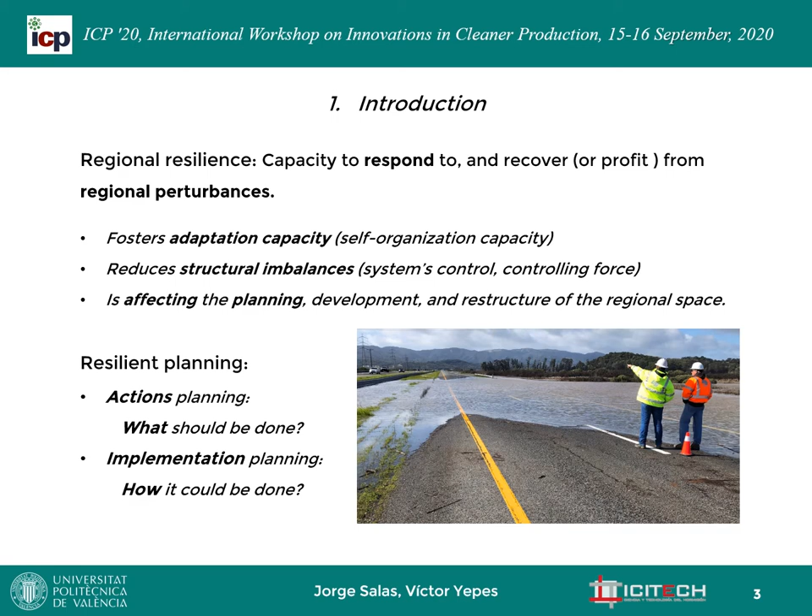Resilient planning, on the other hand, should provide answers to the questions of what actions are required and how these actions can be carried out. In consequence, resilient regional planning must provide a plan of actions for addressing external perturbance which, at the same time, help reducing structural imbalances. Besides, regional planning must promote adaptation capacity and preserve systems control, 2 objectives that usually are in conflict, but which can be balanced by regulating the decentralization level of governance structures.

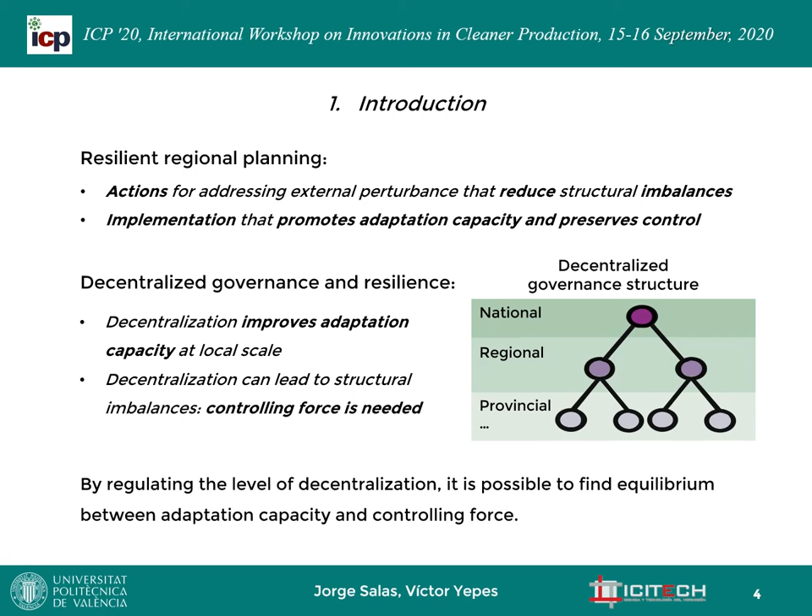While the design of resilient actions has been extensively treated in the planning literature, there are but few studies tackling the balance between adaptation capacity and systems control. This communication focuses on the resilient planning of the maintenance of the Spanish road network. Spain is a country with a strongly decentralized governance framework composed of 50 provinces grouped in 17 regions.

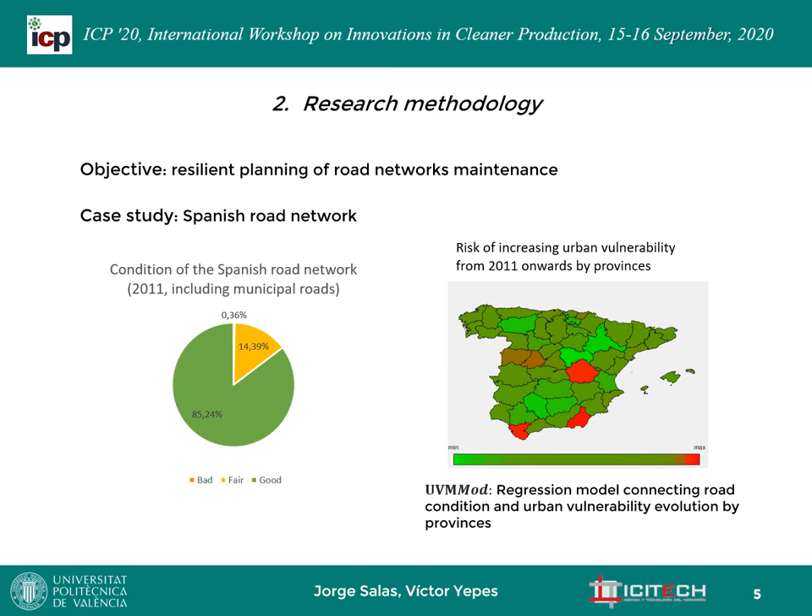Previous work has evaluated the risk of each Spanish province of increasing urban vulnerability, which, together with the condition of the road network at each province, affords a comprehensive planning approach in which both biophysical and socioeconomic aspects are taken into account. Based on the information gathered from the EIEL, a comprehensive infrastructure inventory carried out by the Spanish government, the planning process looks for the quantity of each possible type of maintenance actions that should be performed along the next 10 years. The inventory classifies the road network's current condition in good, fair, and poor condition.

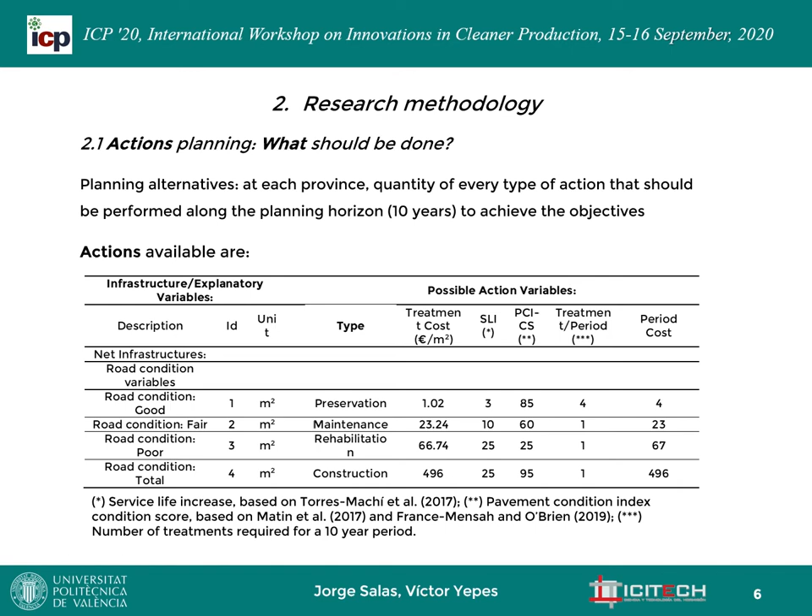Consequently, the types of action that can be taken are preservation, maintenance, or rehabilitation, depending on the condition of the road being treated. In the process of calculating the effect of actions over inventory, roads being treated will present a good condition at the end of the planning period, while those not being treated will degrade. For example, roads in good condition without preservation will be in fair condition at the end of the planning period, and so on. By means of this logic, we can estimate the condition of the road network at the end of the planning period. Based on this, we can easily compute both the condition score improvement as well as the urban vulnerability mitigation.

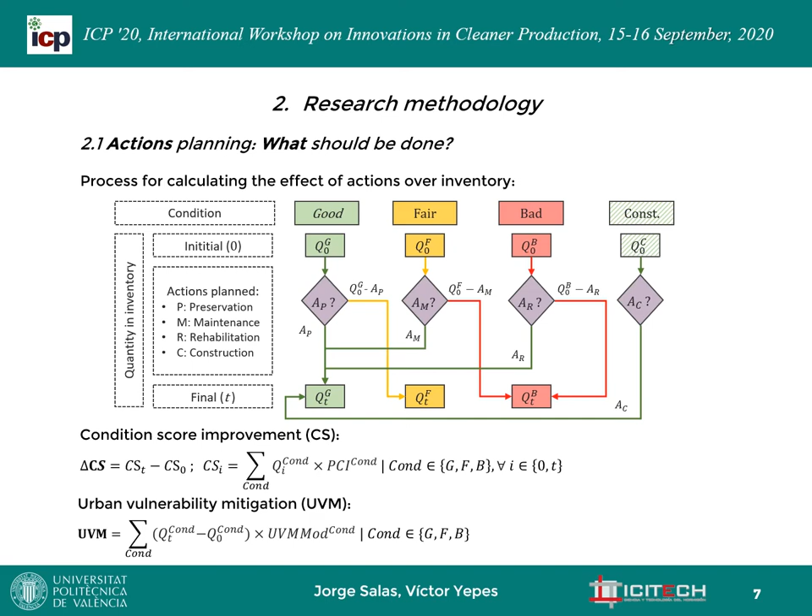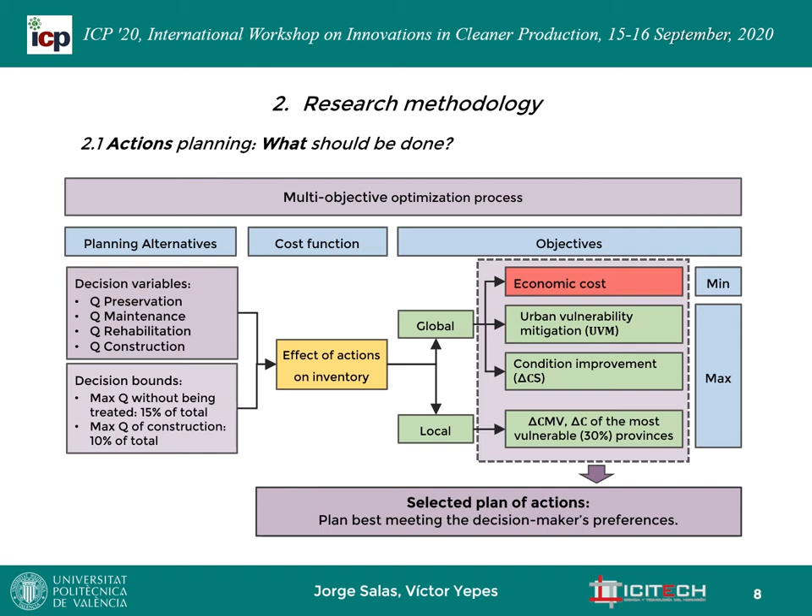The planning process is formulated as a multi-objective optimization process in which the decision variables are the quantity of each possible action to be carried out over each province. There are two types of objectives. Global objectives represent the performance of provinces at network level. These objectives are the minimization of economic cost, the maximization of urban vulnerability mitigation, and the maximization of the condition score improvement. There is also a local objective, the roads condition improvement in the most vulnerable provinces, which aims to reduce structural imbalances between Spanish provinces. The multi-objective optimization process yields a set of Pareto optimal solutions from where, based on the decision maker's preferences, it is possible to select the proper plan of maintenance actions.

As a second step, we need to design how to implement the selected plan of actions across our territory governance framework. We have formulated this governance framework as a hierarchical probabilistic relational model in which nodes are the entities and the links are the relational contracts. These relational contracts regulate the transference of decision capacity and responsibility from the top entity to the down entities. In this scheme, the rights represent the capacity of each down entity to adapt the baseline plan passed from the top entity, while the duties are the performance the down entity must achieve in exchange for the transferred decision capacity.

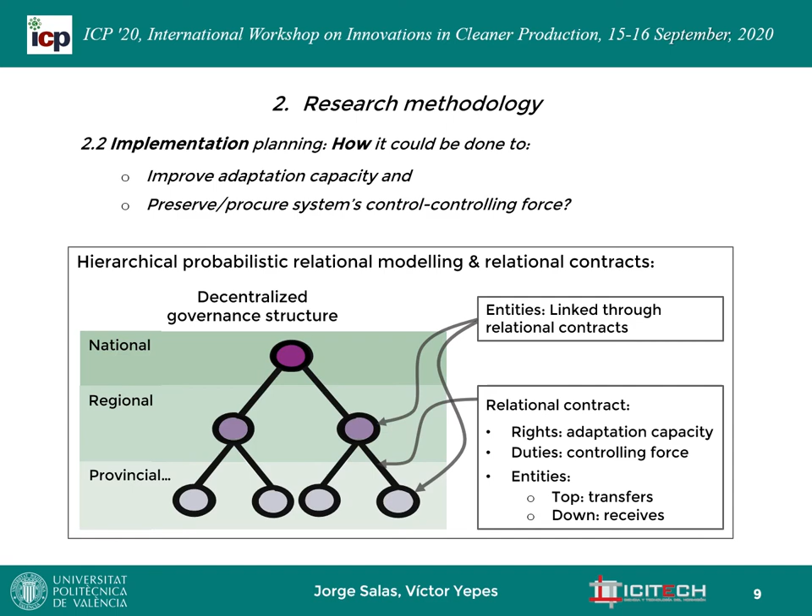We have formalized the logic underlying relational contracts. Rights are the range in which the down entity can modify the baseline plan of actions passed by the top entity, and they are used to build candidate adapted plans. This is where duties come in. Duties are a range from the baseline performance that a candidate plan should meet to be acceptable.

Accepted candidate plans are then carried out, determining the performance of top entities which, in turn, have their own top duties. That is, top entities' performance depends on down entities' adapted plans. In the case that top entities' performance falls outside the top duty range, we will be before a failure or windfall event. And this framework, implemented as a Monte Carlo simulation uncertainty analysis method, affords the calculation of both the risk of worsening the performance and the opportunity of improving it.

Finally, as in the case of the planning of actions, we resorted to multi-objective optimization to find out the optimal decentralization configurations. In the case of the implementation planning, the decision variables were the rights and the duties of each region and provinces, while the objectives were the maximization of local rights, the maximization of local duties, the maximization of local opportunity, and the minimization of global risk. Then, as in the case of the planning of actions, the decision maker can select the most suitable decentralization configuration.

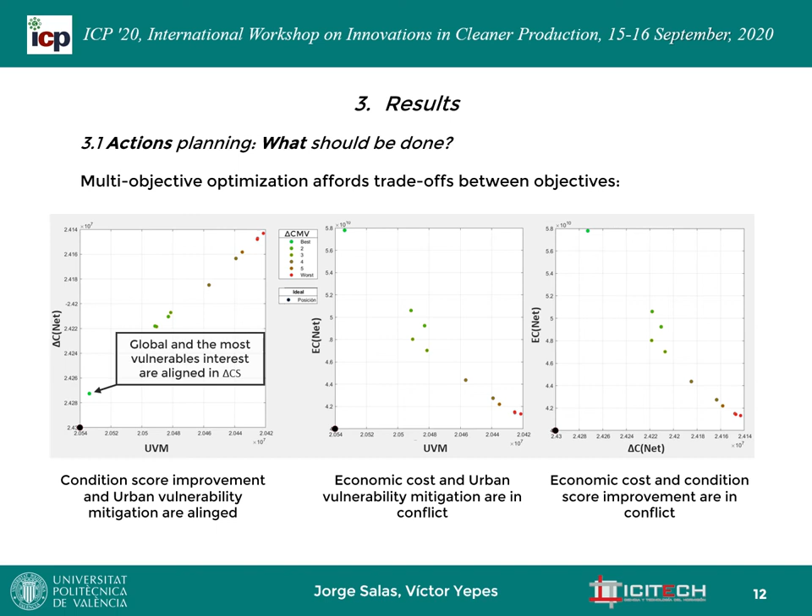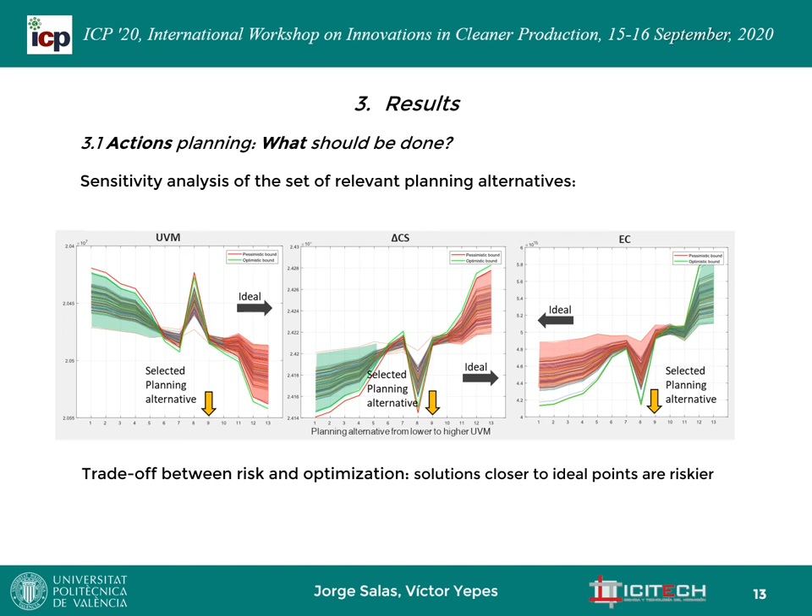On the other hand, we also performed an uncertainty analysis over the relevant solutions. This analysis showed the inverse relationship between risk reduction and optimization, which means that as we approach the ideal solution, we increase the risk of not achieving the expected performance. This information was used to select planning alternative number 9 as the best for the planning of maintenance actions. This was because this alternative, despite being a suboptimal solution in the economic cost objective, is quite robust regarding uncertainties in the condition score and urban vulnerability mitigation planning objectives.

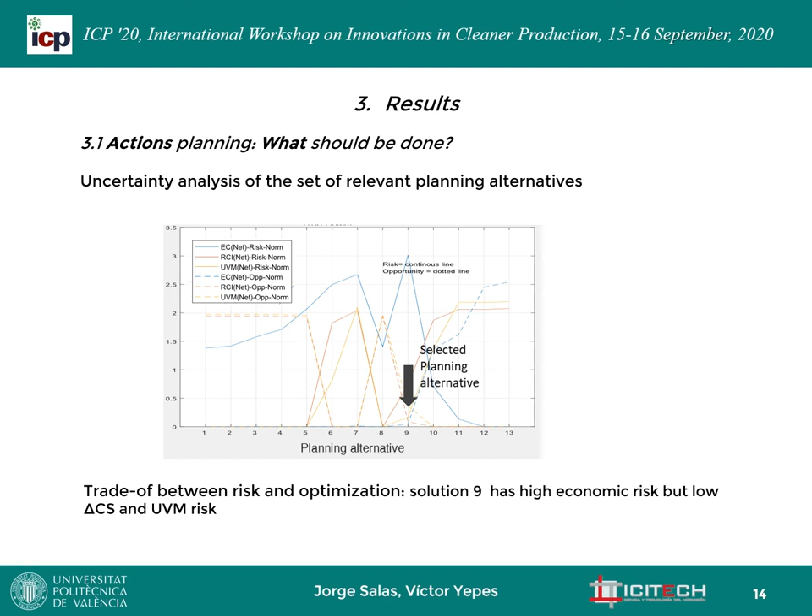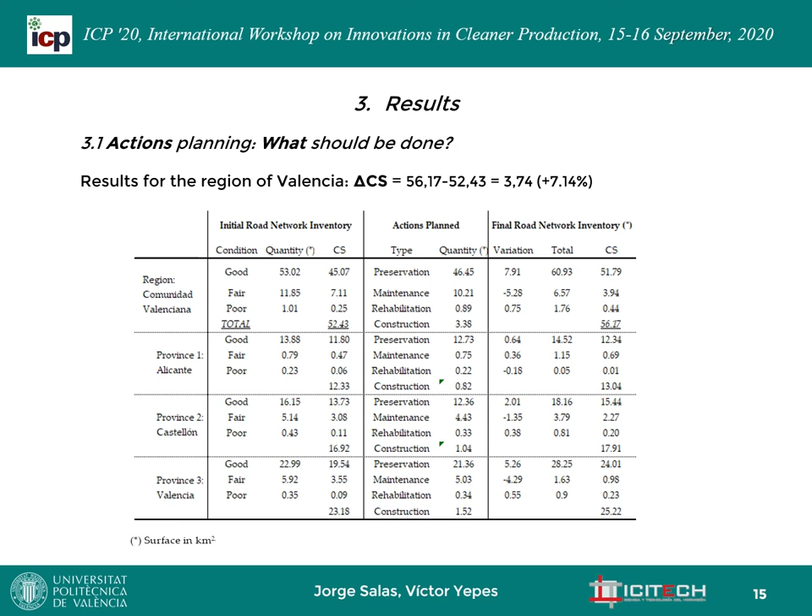This plan of actions contains the guidelines for a maintenance project. In the case of the region of Valencia, for example, these guidelines consist in the quantity of each possible type of action that should be carried out in the next 10 years in each province. As to the implementation planning, the set of Pareto optimal solutions confirms that adaptation capacity and local opportunity are in conflict with global risk reduction, and that local opportunity is in turn in conflict with duty flexibility.

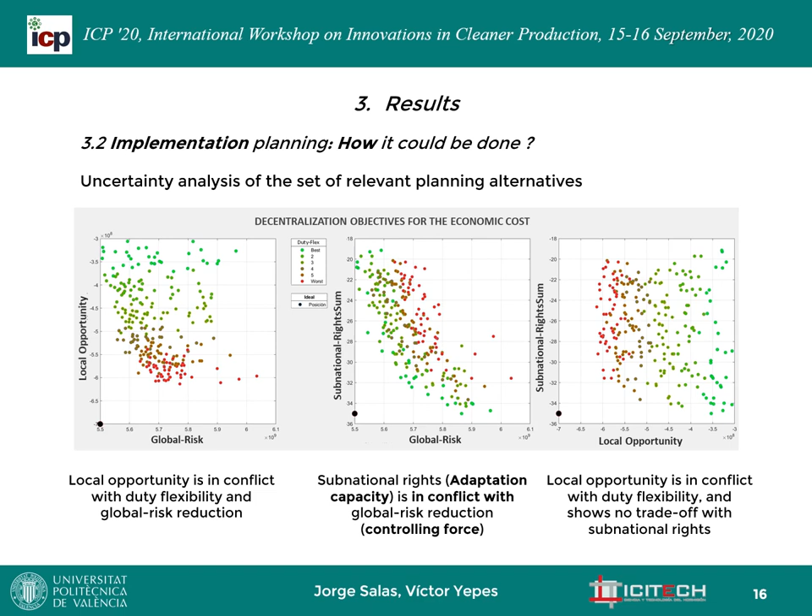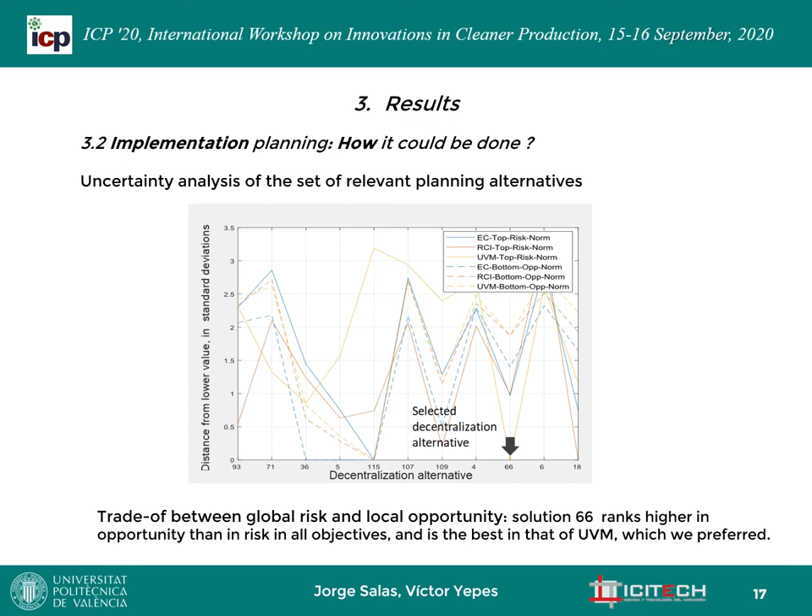As a final step for the selection of the implementation plan, we prioritized the socioeconomic criteria and therefore we selected the alternative with the lowest risk of deviation in urban vulnerability mitigation. In the case of the region of Valencia, the selected implementation plan consisted in a relational contract between the central government and the regional government with a rights range of 14 and duty flexibility of 3. Valencian provinces were entitled rights of 5% and duty flexibility of 5%. Based on these rights and duties, the lower and upper bounds for the generation of adapted plans are calculated, as well as the performance threshold that the adapted plan must achieve to be acceptable.

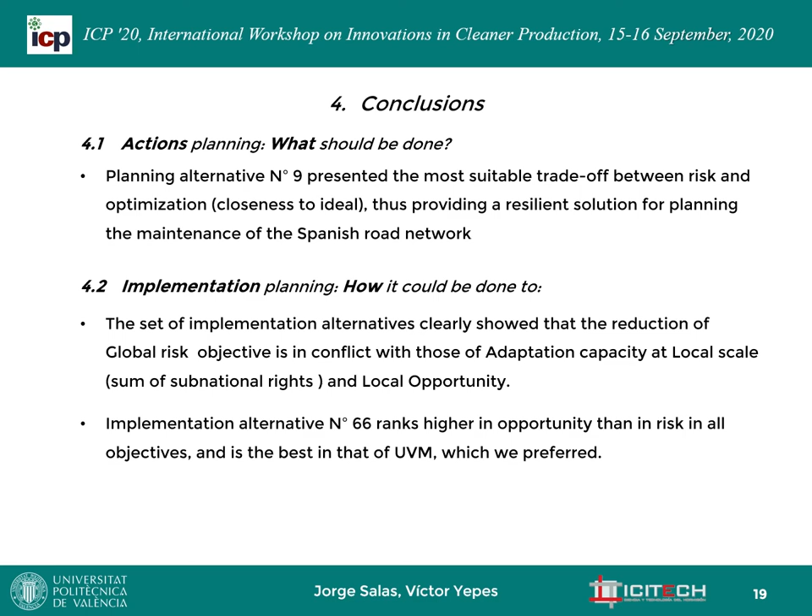As concluding remarks, regarding the question of what should be done, the selected plan of actions presented the most suitable trade-off between risk and optimization, thus providing a resilient solution for planning the maintenance of the Spanish road network. And regarding the question of how it could be done, the set of implementation alternatives clearly showed that the reduction of global risk is in conflict with adaptation capacity and local opportunity. On the other hand, implementation alternative number 66 provides a robust decentralization configuration. This configuration, besides, minimizes the risk of deviation in urban vulnerability mitigation performance, which is the preferred criterion for the decision maker.